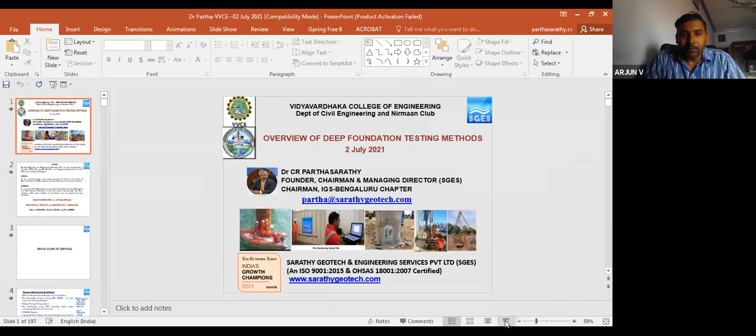Good morning, everyone. It's my privilege to introduce today's chief guest, Dr. Parthasarathy sir. Dr. C.R. Parthasarathy sir is a well-known person in the field of geotechnical engineering. He completed his BE and ME degrees in civil engineering and geotechnical engineering from Bangalore University. He completed his PhD from the Indian Institute of Science, Bangalore in the year 2002. He started his career as a geotechnical engineer in the year 1993. He has been involved in various investigation and engineering studies at various levels for multi-storied complexes, industrial buildings, embankments, bridges, water retaining structures, subways, pavement, offshore platforms, and pipelines.

Parthasarathy sir has worked in various countries like Australia, Malaysia, Indonesia, Vietnam, Thailand, Brunei, etc., and also in Singapore. Parthasarathy sir is the founder director of Sarathy Geotech and Engineering Services Private Limited. The company, with its registered office at Bangalore, was established in the year 2008, which provides both offshore and on-land integrated geotechnical engineering services in India and abroad.

Since 2008, he has been involved in various consultation assignments in the field of ground improvement, pile foundation, marine engineering, on-land geotechnical investigation, offshore foundation assessment including jack-up rigs and platforms. Apart from offshore pile monitoring, Parthasarathy sir is instrumental in promoting the quality testing of deep foundations in India. He is also a member of various professional bodies like the Deep Foundation Institute, Indian Geotechnical Society, Indian International Society for Rock Mechanics, and Indian Concrete Institute. He's a member of the Institute of Engineers, and also a member of the Society for Underwater Technology. It is our pleasure to have you with us, sir.

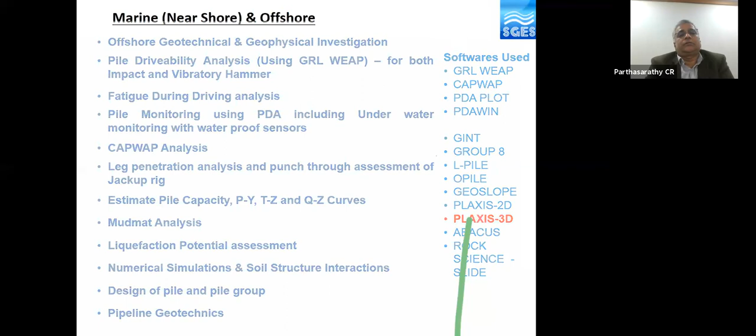Here is the set of softwares that we normally use. The recent one is Plaxis 3D for modeling complex three-dimensional soil structure interaction problems. In the onland space, we conduct geophysical investigation, geological investigation, geotechnical investigation with SPT energy measurement.

I won't spend much time on this, but I'll just give an introduction: design of shallow and deep foundation, dynamic pile load test, crosshole sonic logging, geotechnical laboratory. All the green ones are NABL accredited.

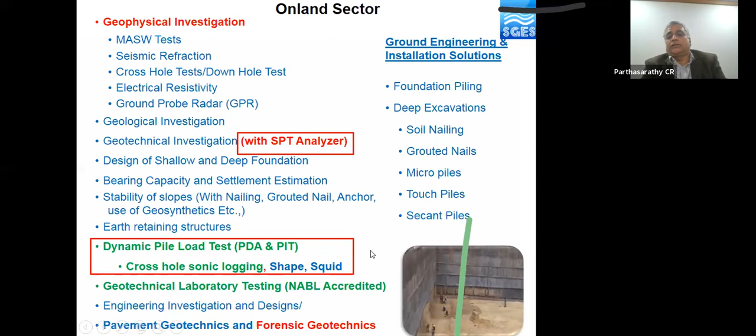I'll be discussing at length about these technologies. The ground engineering solutions, particularly for deep excavations, we have more than 15 projects of designing and building deep excavations with vertical cuts nearly up to about 18 meters. Currently, we are working on a vertical cut of about 22 meters.

So we have introduced these high-end multi-purpose drilling rigs, currently operational for the bullet train project in Surat. It conducts an SPT test with an automatic hammer, with energy calibration. We'll be talking about this using the strain gauge and accelerometers. It'll be similar to what we normally use for the high strain dynamic test as well.

Now coming to deep foundation testing, it's also one of our core competencies. We have complete solutions for deep foundation testing, starting from the conventional static load test: axial compression, pull out, and lateral, maybe with Kentledge or reaction methods. We have also recently introduced, partnering with a Malaysian company called YJACK, bidirectional load test. I don't think I'll be talking about this because of paucity of time. Low strain integrity test, crosshole sonic logging test, and thermal integrity profiler.

I'll just give an introduction to TIP. These two are the integrity methods to evaluate the integrity of the foundation. Shape and SQUID, I'll give an introduction, which is a quality control tool prior to pouring concrete. And we can discuss about this high strain dynamic test.

Okay, now there are many students here, so others kindly bear with me for a few minutes, maybe 2-3 minutes, before I give an introduction and set the context for today's presentation.

As we all know, when we have a weak ground, the loads from the superstructure have to be transferred to a competent ground, maybe available somewhere at a greater depth. That's where we use deep foundations, introduced into the ground, and the loads from the superstructure are transferred through this foundation, called pile foundation.

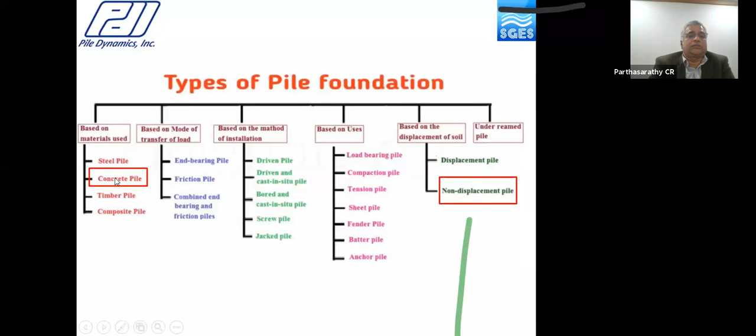So today's discussion will be mostly on the concrete pile, since this is non-displacement pile - driven piles essentially will be the displacement pile. So we will focus today's discussion on concrete and non-displacement piles. To evaluate capacity, as I said, the total capacity of the pile will be the summation of the skin friction component as well as the end bearing component.

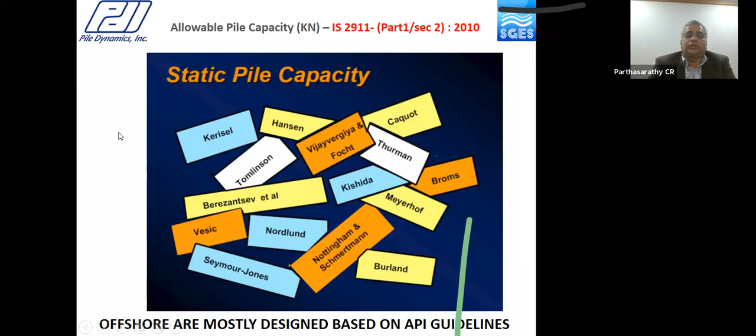There are many methods to evaluate the capacity of piles. I will not go into detail today. Usually for our marine or offshore piles, we follow the American Petroleum Institute guidelines, API guidelines. We also have the IS 2911 Part 1 Section 2 guidelines to evaluate the capacity of piles. So you can use any of these methods, whatever the owner specifications derive.

Now, this is how the static load tests are conducted. You put a kentledge on top of a loading platform, place your jack on the pile, and load it on the reaction methods, and all the loads get transferred. You measure the displacement using dial gauges. It has its own disadvantages - I think today's demand is to put a load cell to evaluate what loads are transferring, rather than using a calibrated jack.

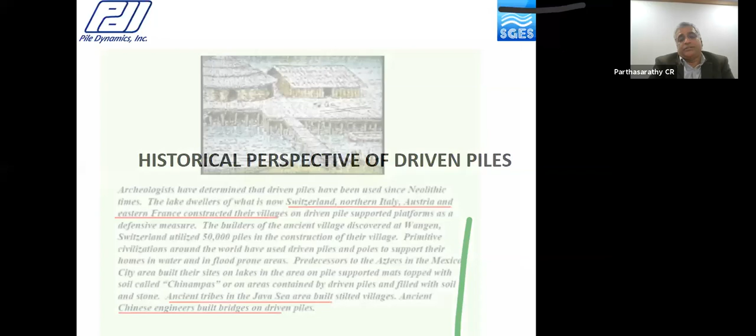So there was a project, an arbitration project. People said driven piles were used, and both sides - the client side, owner side - were all arguing that the pile foundation, particularly driven piles, were very new in technology. They did not know about this and were blaming each other. But when you look back at the literature, pile foundation is not new for civil engineers. Archaeologists have found that several structures were built on driven piles, even in Neolithic times. In those days they were all small diameter timber piles.

You know that the Romans built a bridge on the River Rhine within 10 days. In those days, similar kinds of pile installation methods were used - a primitive loading frame with dead weights - and even today we use the same thing to drive the pile. We just lift the dead weight and drop it on the piles to drive them.

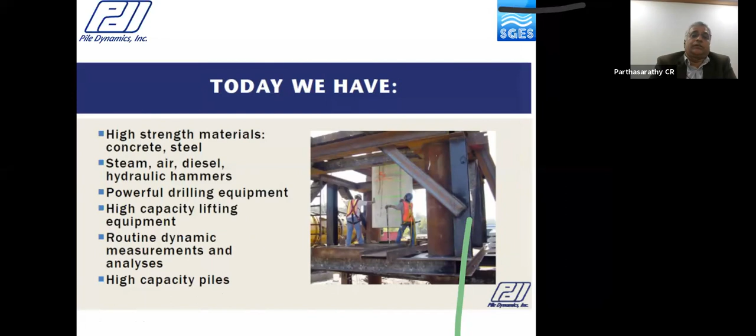So what has changed today from those olden days is the high strength materials, concrete and steel, and most importantly, the capacity of piles. In earlier days, timber piles had a small capacity of about 30 to 40 metric tons. Today, we are talking pile capacities in the order of about 7,000 to 10,000 metric tons. So that has changed today, and the technology has also developed to handle those kinds of high capacity piles.

From these early century skid rigs to drive the piles, today we have construction barges which can handle very high capacity piles. They can handle hammers weighing about 150 tons, which can impart energy in the order of about 2,000 to 3,000 kilojoules.

The pile size is also very small, from 3-4 inch micro piles to as big as around 3.5 meters. We have the experience of monitoring and measurements of those pile foundations.

If you go to the offshore wind sector, the monopiles are in the diameter of about 4 to 8 meters. The length of pile below the ground will be as shallow as around 2.5 meters, called stub piles, and as deep as around 150 to 160 meters is not uncommon. So we have seen all kinds of installations.

So this is a concrete pile, a precast pile. It will be cast in the yard. You can append sections, and then you can drive the pile.

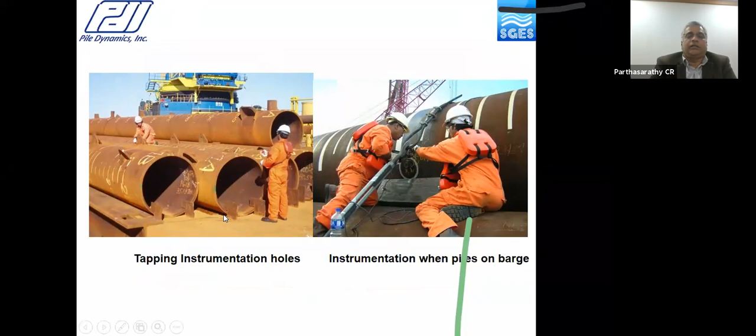So this is a steel pile which we normally use for oil and gas projects. These are open-ended pipe piles. Again, you append sections and then start driving into the ground.

So the piles are driven by hammers, either a gravity hammer or a vibratory hammer. Air or steam hammers and diesel hammers are very routinely used. But today we have hydraulic hammers which are very powerful, popular, and steel-to-steel, so they do not require any cushion. We can drive those piles with hydraulic hammers.

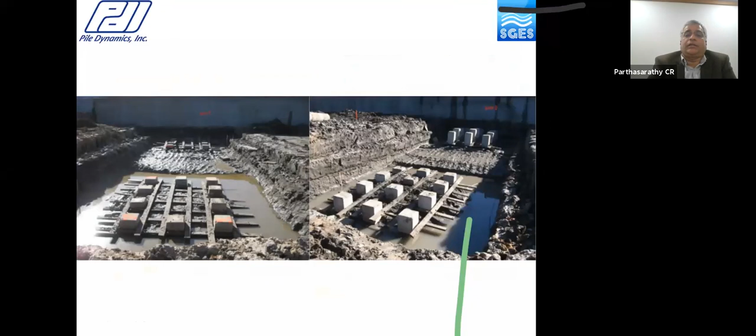So you use a template, particularly when you have soft clays. Even in marine conditions offshore, you use a jacket structure as a template, where the length of this jacket will be equal to your water depth. The piles are guided to this jacket and driven below the seabed.

Based on the set per blow, there are hundreds of empirical equations to evaluate or estimate the ultimate bearing capacity. You could see here the AIC, the Dutch formula, the Weisbach formula, the engineering news formula. There are hundreds of them.

So I draw your attention to this recommended factor of safety. All of these formulas recommend a factor of safety of 3 to 6 - even the Hiley's formula, Rankine's formula, and Janbu's formula.

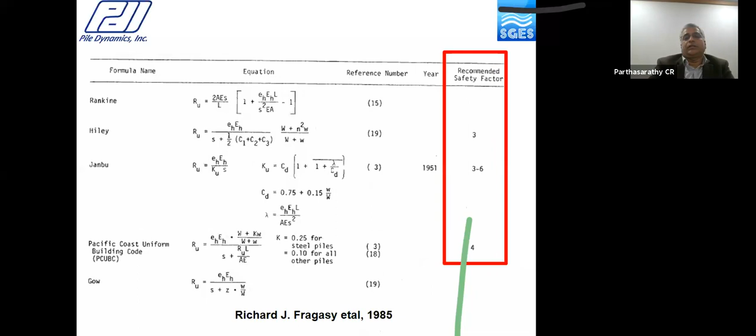We have seen that even today there are some projects which adopt the dynamic formula and use a factor of safety of 2, which is actually very, very unconservative. You cannot use that. The simplicity of most pile driving formulas leads to a major disadvantage: their inaccuracy. Use of these driving formulas exclusively can lead to dangerously low factors of safety and uneconomically high ones. The variety and number are matched only by their shortcomings.

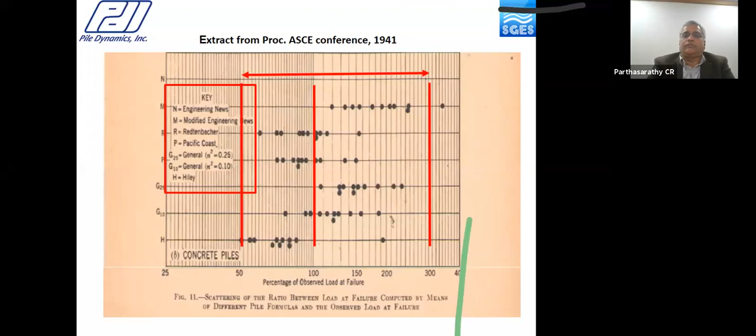And thus, the dynamic formula was disgraced in the early 1940s. Later on, Smith in the early 60s developed the one-dimensional wave propagation theory. The extension of Smith's work was the work of GRL and Pile Dynamics, who built the pile driving analyzer and so on.

So I'll give an introduction to that as well. In 2015, they released a newsletter, Pile Dynamics, stating that designs based on dynamic formula were already discouraged in the 40s. They were referring to that ASCE conference where Terzaghi had made that presentation.

During the installation of pile, the pile could be perfect. You can have an intact pile, or there could be an anomaly like necking, a reduction in cross section or impedance, cracking of the pile, or bulging of the pile. This anomaly can happen anywhere along the length of the pile - at the bottom, at mid level, or at the top.

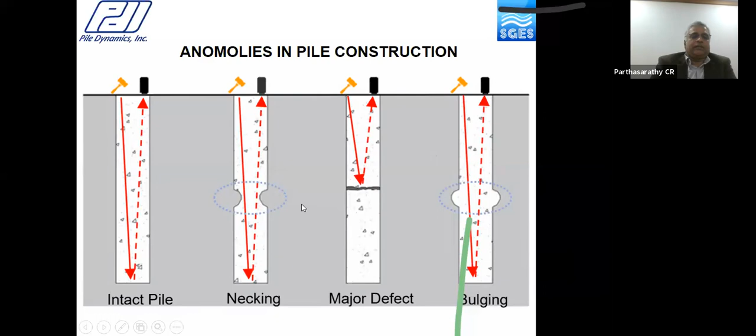Once the piles are introduced into the ground, there's no way you will be able to evaluate unless there are some measurements. This is a project where driven piles are already broken or bent. While excavating for constructing the pile cap, only 2 meters down, the piles are all broken. So there is no load yet, and these piles have to withstand the load from the superstructure of about 16-17 stories.

Now, during driving of those precast piles, the tensile stresses could be very high, even the compressive stresses could be very high. So the piles could be susceptible to damage.

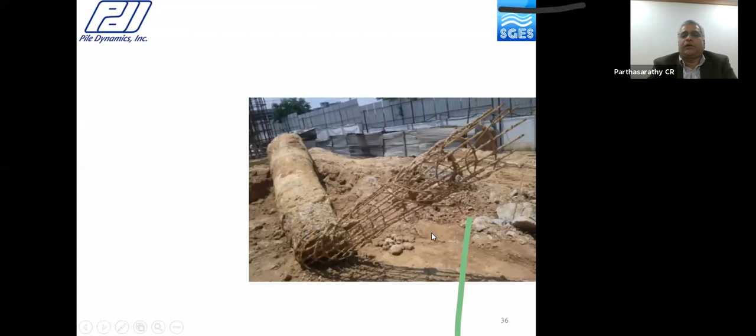This is another case where the pile was installed in a project which has to carry the load from a superstructure of about 22-story buildings. For the lift pits, they have to excavate a little deeper to cast the pile cap. So when they started excavating, they could see one stirrup. They excavated a little deeper, another stirrup, and finally when they exhumed the pile, the bottom 3 meters did not have concrete.

And this is not uncommon - we have seen this in many projects. It is a very short pile. The top of the pile is so good, but at the bottom there is no concrete at all. When you exhume it, you could see that these are all stub piles meant to be placed on the rock.

So you could see the anomalies in pile installation. The pile tops could be damaged, there could be necking, there could be bleeding of concrete, the pile toe could be damaged, there could be serious defects within the pile.

So how do we evaluate the defects in the pile once it is in the ground? Structural engineers and architects' work is already recognized because you see the superstructure, but the geotechnical engineers' efforts are already buried in the ground because these foundations are inside the ground. So you will not be able to evaluate unless there are some measurements made.

So friends, today we have a whole arsenal of modern technology and tools to assist in providing efficient and economical deep foundation solutions.

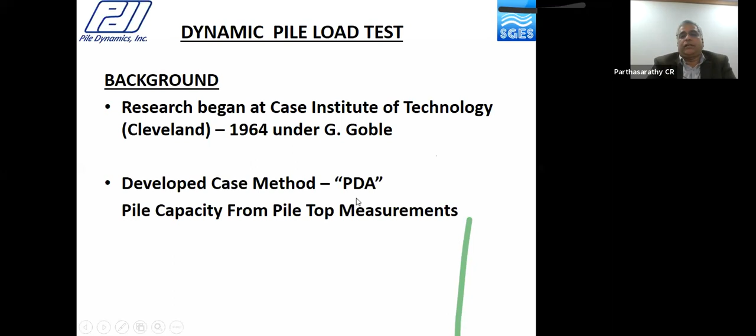Because of the limitations of pile driving measurements in earlier days, with only set per blow, research began at Case Institute of Technology and resulted in the development of the Pile Driving Analyzer, which gives pile capacity from pile top measurements. The Wave Equation Analysis Program - I will not be talking about this today - is essentially for pre-installation study for hammer selection. The Case Pile Wave Analysis Program is CAPWAP. This is a post-test analysis.

The data from the PDA is imported into the CAPWAP software and analysis is made to evaluate the capacity of the pile.

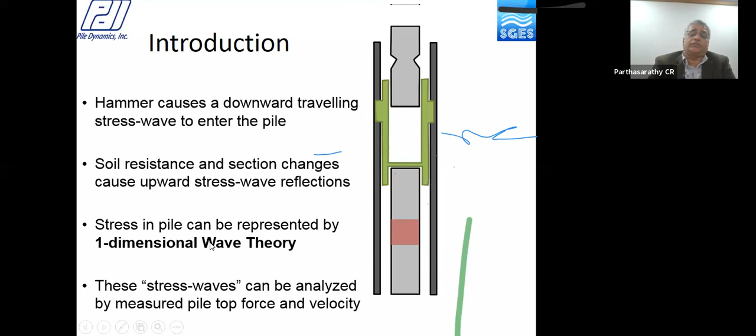And these stress waves can be analyzed by measured pile top force and velocity. So how do we make measurements of this force and velocity?

We can make measurements by embedding a strain gauge below the top of the pile. The strain gauge measures the strain in the member. We know the modulus, which is stress divided by strain, so if you have the strain measurements, you can get the stress. Knowing the cross-sectional area, you can get the force.

And mounting accelerometers measures the motion of the pile - integrating these accelerations will give the velocity. The force and velocity are proportional with a constant called impedance, which is defined as the modulus times cross-sectional area divided by the wave speed. I'm not going to derive this relationship today - this is part of the training program, so we can actually derive this relationship there.

So when there is an impact on the top of the pile, the stress wave actually enters - this is where you see the initial rise of the stress wave. As it passes through the gauge locations, the peak of those stress waves passes the sensor location.

That's where you see the initial peak. The stress wave propagates along the length of the pile. That is where you see the response from the toe.

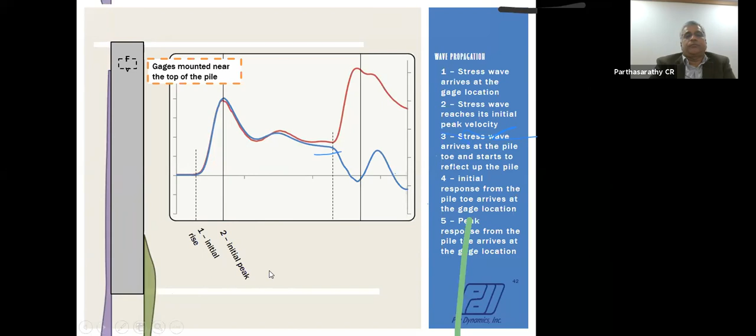The gauges don't see this unless the reflected waves come back to the gauge location. Now the reflected waves come back to the gauge location and pass through, that's where you see the initial toe response and the peak toe response.

So what you see on the graph is a force measured by the strain gauge. The other color is velocity multiplied by impedance, which is again a force unit. So it's force, velocity, time history.

Now this stress wave, when it enters the pile, has to travel a distance L, and then it has to travel another distance L when it reaches the gauge location to see the toe response. Therefore, from the initial peak, a time 2L divided by wave speed will be the time on the x-axis. That is where you see the toe response. This is the top of the pile, and 2L by C time thereafter you see the response from the pile toe.

Now the force and velocity are on top of each other. That means there is no resistance or impedance change, no cross-sectional change. If there is soil resistance, you will see a difference between the force and velocity. A separation of these waves we'll see in the next slide.

So when you give an impact in a low strain test, a small impact pulse goes down, travels down, and then there is a reflection, an upward traveling wave. So there's a downward traveling wave and an upward traveling wave.

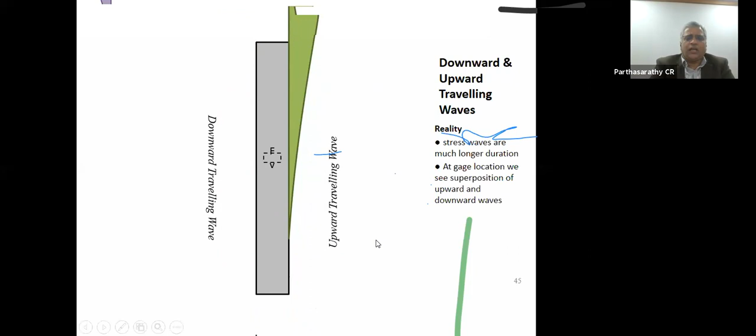So we need to separate what is coming down and what is going up. That's a part of the interpretation. I'm not talking about it in detail because of the paucity of time. I'm just giving you some introduction background so you all understand.

This is very important because when you undergo training, you will have this know-how, and you will be better able to put it into practice and collect good quality data, and analysis also becomes very easy.

So now getting back to the testing procedures, the quality control tools we have today: prior to pouring concrete, SQUID and SHAPE. Post-concreting, the integrity methods - low strain integrity, pile integrity test, cross-hole sonic logging, thermal integrity profiler, and the high strain dynamic test. We'll examine each one of them briefly.

So this is the SQUID, for Shaft Quantitative Inspection Device. This will evaluate the thickness of contamination at the bottom of the boreholes, because this is very important particularly for the end-bearing piles, which derive their capacity mostly from the base, say for example the rock-socketed pile.

We do not want to see any contamination at the base of the pile. If it does, the piles will experience large settlements during the load test, and you will not get the requisite factor of safety. So even prior to pouring the concrete, if we can monitor the quality aspects and ensure there's no contamination at the base of the boreholes, I think we are assured of the requisite factor of safety from that pile.

So the equipment looks like this. It has 3 penetrometers at the base. It could be like a conical penetrometer, similar to what we normally use in the CPT test in geotechnical investigation. It could also be a flat cone, a flat base. The area of this will be 10 centimeters square.

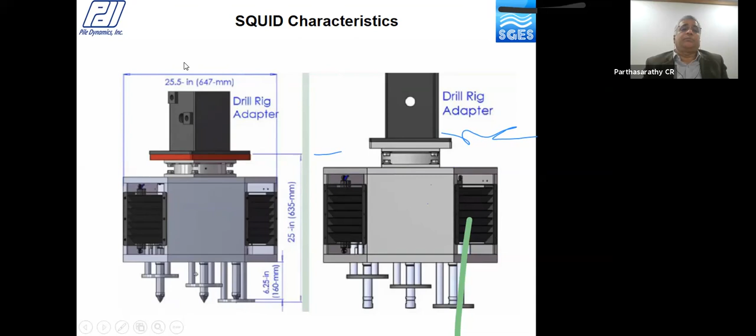This also has a retractable plate. As you push this tool into the borehole, there will be penetration of this cone, and these retractable plates move up. There's a force measured by the cone, and there's a displacement measured by this retractable plate. This can be connected to the Kelly bar of the piling rig directly.

So this is how it is attached. You could also have various sizes of these adapters, depending on the tool available on the site - 6 inches, 8 inches, 10 inches, or so on.

Now, as the tool is lowered into the bottom of the borehole, and the force is released by the Kelly bar, these cones start penetrating into the base of the borehole. The colored zone could be a contamination, and the retractable plates move up, so that's why you see the displacements. So what is the philosophy of this?

The philosophy goes back to Terzaghi's ultimate bearing capacity theory. We all know that for circular foundation, the ultimate bearing capacity is given by this formula. Now, when you have the contamination, which is assumed to be cohesive material with consistency of 12 to 100 kilopascal - if anything less than 12 kilopascal shear strength, it is expected that the contamination gets displaced when you pour the concrete. If it is more than 100 kilopascal, it is also treated as a natural material. So anything between 12 to 100 kilopascal consistency is treated as the contamination.

Why is this 12 to 100 kilopascal? Not necessarily 12 to 100 kilopascal - we have some guidelines from experience.

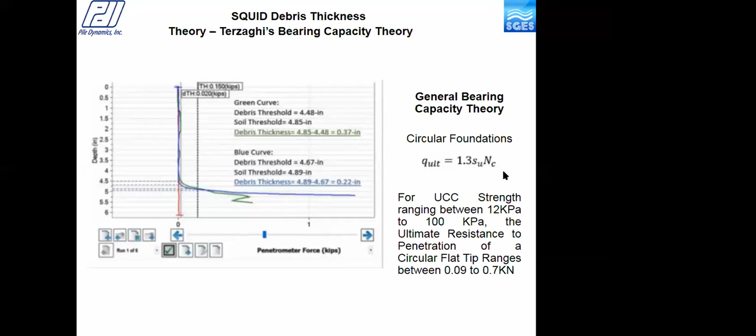So why is this 12 kilopascal, 100 kilopascal? This is some guidelines that Pile Dynamics have arrived at. If we have some local experience that, okay, up to 20 kilopascal, the consistency of the muck can displace, we are free to use that. If we want that, okay, up to 150 kilopascal, only then I consider this a natural material - we are free to use that. And this equipment has that option to actually input that value.

So we have the soil threshold and the debris threshold values. We can actually input that based on our local experience. But as a general guideline, 12 to 100 kilopascal is what is suggested by Pile Dynamics, which you compute for that 10 centimeter square area. You get a force of 0.09 kilonewton to 0.7 kilonewton, corresponding to 12 kilopascal and 100 kilopascal. So when you start lowering into the bottom of the boreholes, there will be a displacement of the retractable plates, and a force measured from the 3 probes.

When you reach between 1 to 2 kips, it is around 5 to 10 kilonewtons, you can actually stop the test because you are already reaching a natural material. You can unload, and then you can release the force and also release the displacement plates.

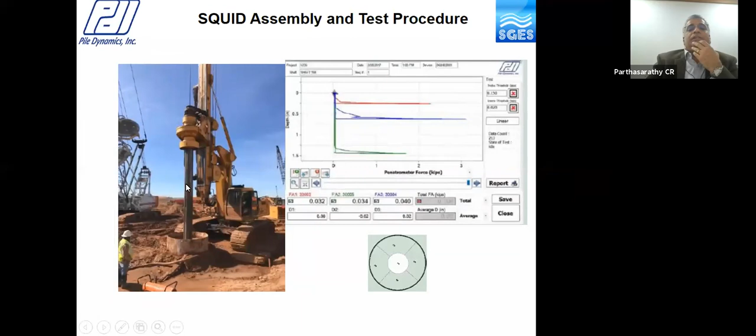So in the enlarged screenshot, this is the displacement corresponding to a force of 0.07 kilonewton, which corresponds to 12 kilopascal shear strength. This is 70.7 kilonewton corresponding to 100 kilopascal. The difference will be the thickness of the contamination at that probe location, and likewise for the other probe locations.

The philosophy now is the average of these 3 things should be less than some limit, some guidelines. So there are some guidelines that it should not be more than half an inch - there are some very strict guidelines in the US. So if it is more than half an inch, you have to clean the boreholes and redo the test.

So this is how you see the data on the tablet. Directly, it can give the thickness of those contamination for each of those probe location. If it is more than half an inch - here in this case the averages are nearly 4 inch - probably you have to do the cleaning of the boreholes and redo the test.

When you actually redo the test, you see there is no contamination at all at the base of the borehole. Therefore, you are very confident that the piles are going to take the load that you expect. Now, we introduced this in the Metro project. This is first of its kind in the country today.

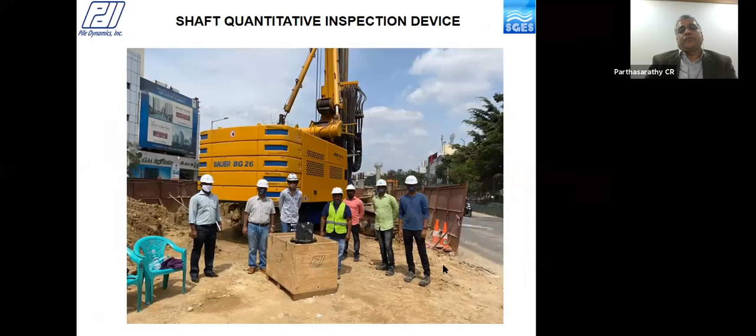The squid equipment was connected to the Kelly bar of the piling rig. We released it lower down into the bottom of the pile borehole. You see the contamination at one of the probes is 79.4 millimeter, 136 millimeter, 81 millimeter. The average is nearly more than 4 inches. So then the thickness is not acceptable, particularly for an end-bearing pile.

If this is a large diameter pile, you could do the test at different quadrants, 5 times 5 numbers, because all the 5 trials you can take the average. If it is a small diameter, say around 800, 900 millimeter, you could do 5 trials at one same place and take the average of all the 5 trials.

In this quadrant, you see the average is also still very high. And the next quadrant is very high as well. And the other quadrant also is very high. So it requires the pile has to be cleaned before they pour the concrete.

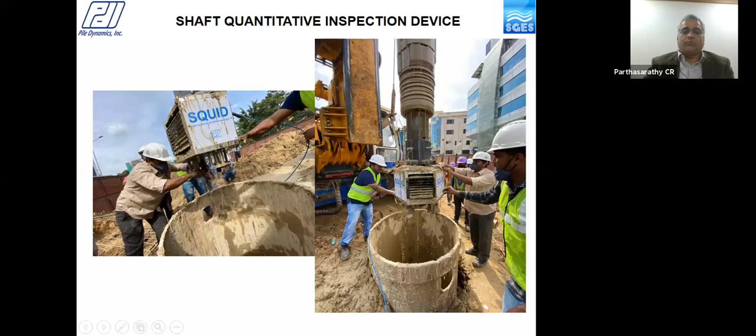When you remove the squid, you see the contamination sticking to the cones and the retractable plates. So this was a pilot project we commissioned, but apparently the contractor did tell us they cleaned the borehole before pouring the concrete. We did not do the test after this exercise. Probably in the next occasions when we have more database, I can share more information to you in the future.

So the next one is the shape. It's called Shaft Area Profile Evaluator. So this is also a quality control tool prior to pouring the concrete. This tool, like the squid, can be connected to the Kelly bar of the piling rig.

This has 8 ultrasonic sensors embedded radially. These ultrasonic sensors will release pressure waves when there is a change in the geometry of the piezoelectric element due to voltage. As you pass this equipment into the pile borehole, the pressure waves are released.

It hits the boundary wall, and there's a time recorded, and you know the velocity. There are 2 sensors at a known distance behind these radially embedded sensors, which will actually measure the wave speed for calibration purpose.

So what this shape will give you will be the profile of the pile bore excavation. What you could see here is the top of the pile, which has a liner. So there's no change. Below the liner, you see there's already an eccentricity, so the alignment has slightly changed. You see this is a diameter at the bottom, the red one, and diameter at the top. So the eccentricity is already there.

If there is an eccentricity, I think this will induce moments, and thus it will also reduce your load carrying capacity. Now, there is also a problem the contractors normally face when pouring the concrete. Suppose there is a weak material, a lot of concrete has gone in - the consumption of the concrete is more than the theoretical concrete. So you'll never be able to argue with the client because they will have a specific number put in the tender for theoretical consumption, but actual consumption could be much higher.

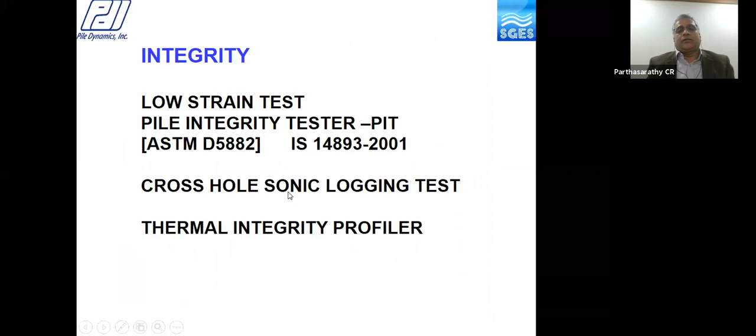Okay, now let us move on to the next topic, quality control after pouring the concrete. One is to evaluate the integrity. What are the methods we have? We have the low strain integrity test, cross-hole sonic logging, and thermal integrity profiler.

Let us examine briefly each one of them. The low strain method is quick and cost-effective to evaluate the shaft integrity of concrete, and this test is able to provide information on continuity, location of defect, and degree of defect. This will not give the bearing capacity of the pile, okay? And this is performed with a handheld hammer, a sensitive accelerometer, and a pile integrity tester.

So why do we do the test? In order to find defects, assure quality, and reduce the risk. We do not want deep foundations like this that don't carry the load that we wanted, and finally jeopardize the safety of the foundation and the risk also, right?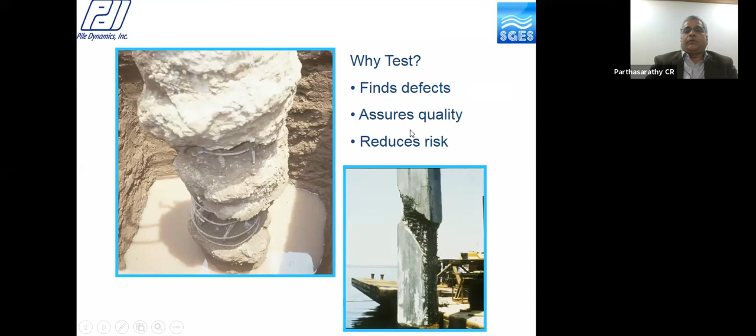The test is performed by actually preparing the pile top. All the loose contaminated concrete has to be removed, and then the locations where you mount the sensor has to be ground properly to get a flat surface. With a small handheld hammer, you give an impact, connect to the pile integrity tester, and you will see this velocity time history.

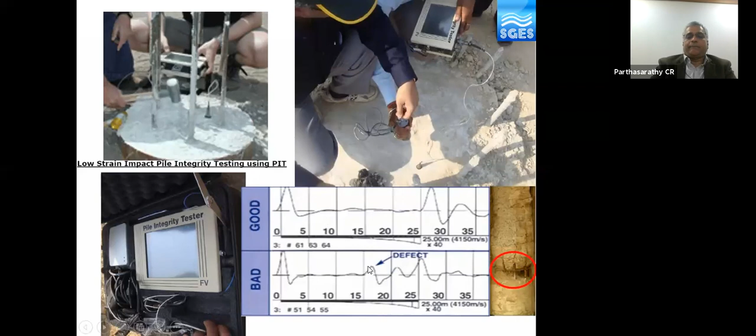This is the top of the pile, this is the bottom of the pile. If there is no resistance or impedance change, no cross-sectional change, this is how the data looks like. But if you see any necking, you will see a positive reflection. If there is any bulging, you will see a negative reflection here. This is very simple, but what you require is to get good quality data.

So in order to get good quality data, some amount of preparation is necessary at the site. You need to prepare the pile top by removing the contaminated concrete, cut the rebars to minimum length and bend them outside wherever possible, make a flat spot, and attach the sensors by grinding the surface to get a smooth surface.

Now, what do you think of this pile top preparation? If you think this is good, type good. If it is bad, type bad in the chat box, please.

The pile top is not ground in this case, so it is not acceptable. This pile top should be ground to get a nice flat spot to attach the accelerometers. Otherwise it becomes very bad. Yeah, many of you are giving feedback bad. Awesome, okay.

Now there are different types of equipment: a hammer, the accelerometer, and a tablet to get the data. There are wireless accelerometers that could be used, and this model is very small in size. It can be a palm top, you can see it on your hand. But the interpretations remain the same.

And more importantly, you have to decide on the size of the hammer. Why is this important? On the left side you see a 1 pound hammer, and the bottom is a 6 pound hammer, which has a very high width of pulse. This is a small width of pulse with a sharp impact.

Now why is this important? Because the width of the initial pulse affects the evaluation. For a very wide pulse, the reflection from the defect overlaps the initial pulse, making it even wider. So if there is any defect near the pile top, that gets masked.

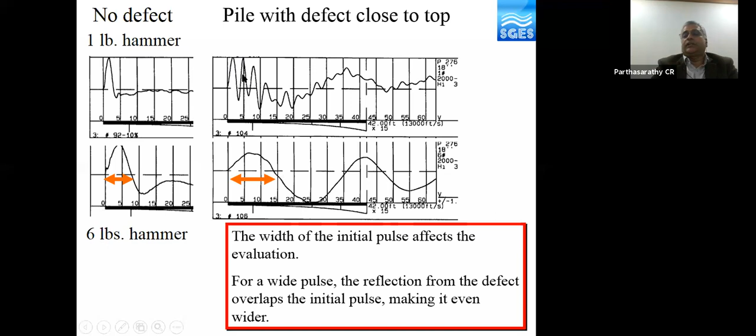You will not be able to detect this if you have a very big hammer. But if you have a small hammer, probably you can evaluate the defect near the pile top. That's why you have to calibrate these hammers for different types and sizes of piles.

As I said in the beginning, the piles can be very small in diameter to very large in diameter. It can be at a shallow depth of around 1.5 to 2 meters, and also the piles could go to around 70-80 meters, which is not uncommon particularly for bored piles.

So how is this data looking? Please type out in the chat box. How do you look at this data?

You see the top of the pile and the response on the pile toe, right? Do you see any anomalies here? There's no anomalies here, because there are no positive reflections. So this data should be very ideal, very good data.

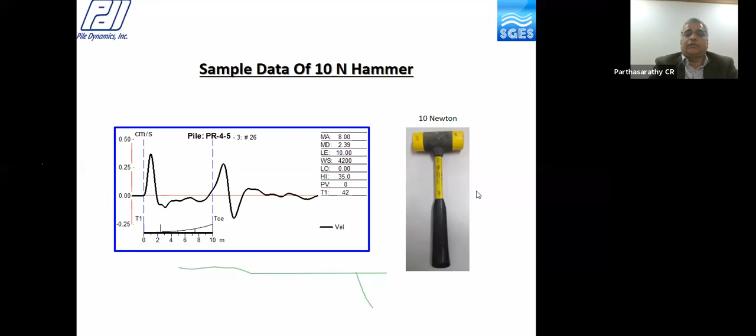Now you have to tell me. Please tell me what do you think of this pile on the top, the first one. Is it a good pile? Is it a bad pile? Please type out on the chat box. The top one, is it a good pile or a bad pile? If it is good, type out good. If it's bad, type out bad.

Very good, good, thank you. Awesome, very nice response. So this is a good pile.

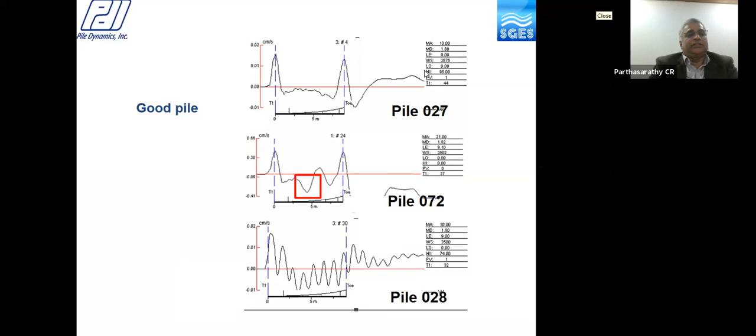So this pile has a bulge, because there is a negative reflection. It is a pile with a bulge. And what's the last one?

Can anybody type out what is the last one? What do you think about the last one, the third one? Someone says anomalies, crack, the top one, defect. Yes, so there is a serious defect near the top of the pile, and you see a positive reflection close to the pile top, indicating a serious defect near the top.

So this is how the interpretation works. To get this kind of good interpretation, you need to get good data. If you do not get good data, it becomes extremely difficult to analyze.

There are many other interpretation methods. Even before interpretation, you have to do the conditioning of the data. I'm not talking about this because there's no time - it's a fun, full-day course actually learning about the pile integrity test itself.

Now I'll just share with all of you one case study. You see the top of the pile, there is a bulge, and then there's a neck. We understand that a positive reflection is a neck and a negative reflection is a bulge. And for the given pile length, you see the toe response here.

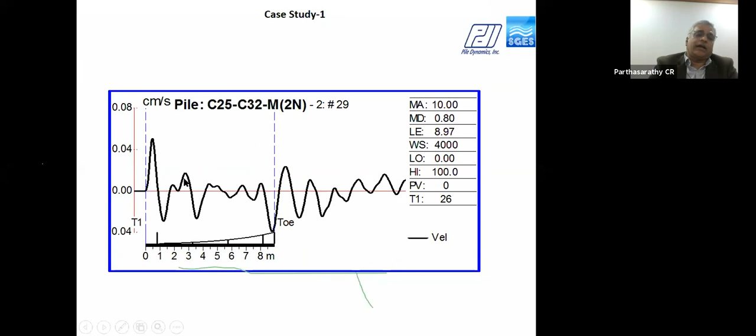So is this bad or good? Well, let us examine that.

Actually, this is a positive reflection because the bulge is returning to its nominal diameter. Let us see this bulge returning to nominal diameter. Okay, so this is how the bulge is there, very close to the pile top, and then it is returning to your nominal diameter.

For that kind of data, our boys have gone and physically measured the diameter at various pile penetrations, which is what you see here. The average of this is between 1.4 to 1.6 meters. If you run a profile analysis, the bulge is evident here and it is returning to a nominal diameter. This per se is not a bad pile. This is a bulge returning to nominal diameter.

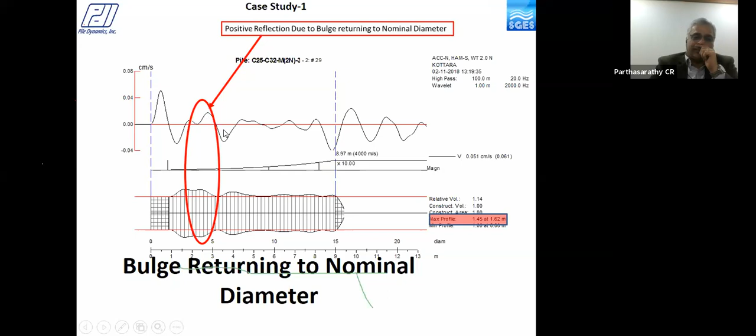So when you have a negative followed by a positive, you have to be very careful in the interpretation. But if there is a positive first and a negative, it is for 100% sure there's going to be a defect in the pile. Slow with the other direction, the photographs clearly indicate there is a bulge returning to nominal pile diameter.

Now, what do you think of this? Pile length is 5 meters. So what do you think of this pile? Can you type out in the chat box? Is it a good pile, bad pile, or a short pile? Please type out in the chat box.

Short pile. Yes. Awesome. See now, short pile. Very nice. Now, why is it a short pile? Let us examine this.

This pile length of 5 meters is given by the client. When you actually look at the data, there's a positive reflection happening prior to the toe, right? That means for this length of the pile, up to 3 meters, the integrity is fine, but below that is a question mark.

Now, when you actually exhume the bottom of the pile, up to 3 meters from the top it is excellent, and below 3 meters, I think there's no concrete here. That's where you see a positive reflection indicating a serious defect in the pile.

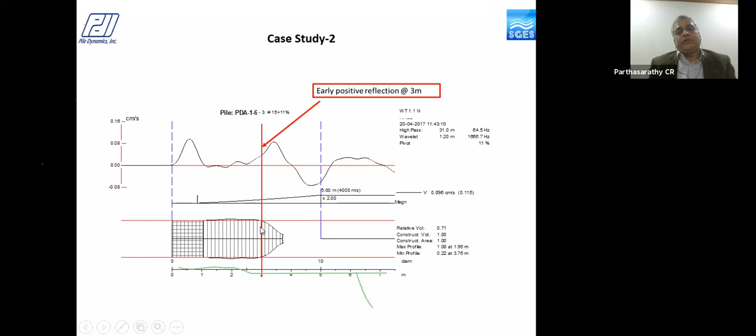So this is how these tests are powerful in evaluating the major defect of the pile, and this pile can be considered a short pile because the length is only 3 meters. Beyond that, it is not going to carry any load. Even if you run a profile analysis, you see the volume of concrete consumed is only 70%. For that 70%, the shape of the pile is very good only in the top 3 meters, and beyond that there's no concrete.

Okay, I can skip this; a similar case I already explained. We have seen so many cases, but just as illustrations I picked up two cases. Now we saw the force-velocity time history, positive peak first, and then the response from the toe. There are some equipment that give you a mirror image of the data we've seen earlier. This is a European-made equipment; the earlier one is the US-made equipment. So don't get confused, this equipment is also in the market today - only the interpretation is a mirror image.

Now, the advantage of PIT is it's fast, inexpensive, mobile equipment. It requires minimum support, and you can test as many piles as possible. The guideline is to test 100% of the piles. No advanced planning is required, unlike the next method I'm going to discuss. Only the pile top preparation is necessary, and it will find the major defects - we have already seen some illustrations.

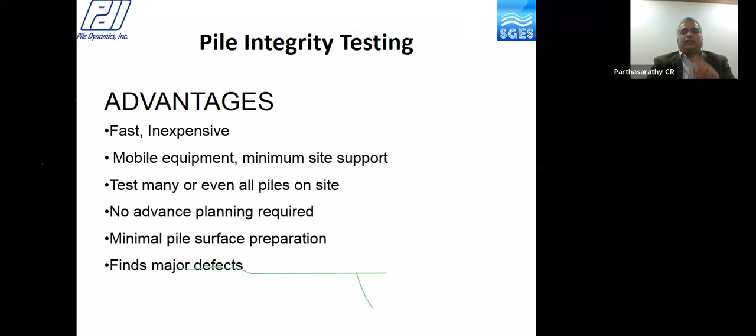Now moving on, the next integrity method is the cross-hole sonic logging test. This is frequently specified to detect defects in drill shafts. Since drill shafts are very few in number - for a pier you may have some 3, 4, 5 drill shafts - each of those drill shafts is expected to perform very well, and we have to assure the integrity of those foundations. So how is the test performed?

The test is performed by embedding access tubes - PVC or steel tubes tied to the reinforcement - prior to pouring the concrete. Then you pour the concrete with the bottom closed and fill these tubes with water. This is how the access tubes are embedded. How many access tubes to be installed? That depends on the diameter. As a thumb rule, for every 300 millimeter diameter, one access tube is required. Then you insert the probes - one is the transmitter, the other one is the receiver.

So once you insert these probes to the bottom and you pull the probes bottom up, for every 50 millimeter, there is a sonic wave that is emitted from the transmitters, which is received by the receiver. The time is recorded, and you know the velocity. So it's like the ultrasonic pulse method for concrete. As you do a bottom pull up, every 50 millimeter, you will be able to record the data.

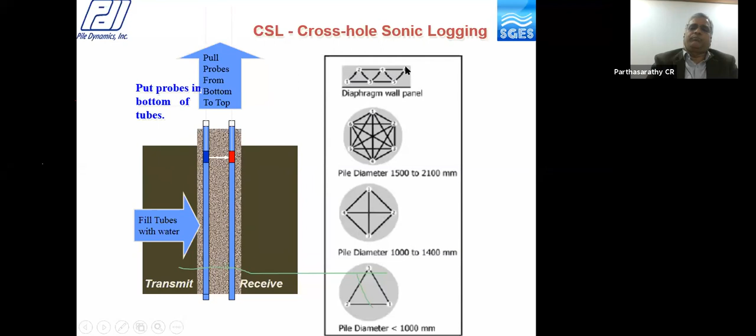So this is how the configuration of the access tubes depends on the size of the pile. If it's a larger diameter, you can have up to 6 in numbers or even more. For a barrette or a diaphragm wall, you can embed this every 1 meter distance. Now, it's very important to measure the distance between the access tubes.

Because this measures the time, and you know the distance to get your speed and velocity. This is a CHAMP cross-hole analyzer, the latest model called CHAMP Q. This can be calibrated as per ASTM standards once every 2 years. And recently, those probes are called transceivers.

It can transmit as well as receive from the other transceiver. So this is also the certificate of those transceivers. These transceivers need not be calibrated. Only the equipment has to be calibrated as per the ASTM standards.

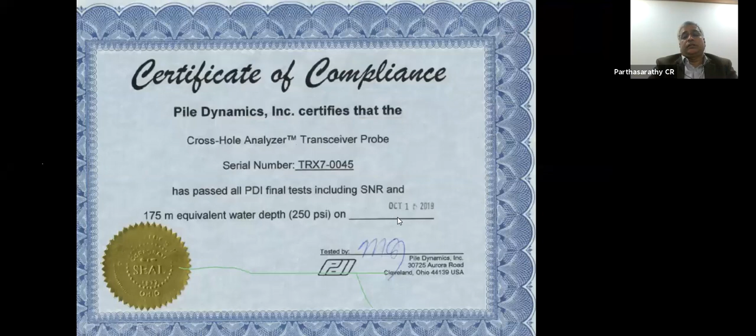And you see the different color-coded wires that go into these probes. So you can use 4 probes at a time. So the efficiency has now improved by 6 times. That means you can introduce these transceivers in 4 access tubes and pull simultaneously. So all possible combinations of these 4 probes introduced can be recorded with the data. So this has actually increased the efficiency by 6 times.

This is one of the accreditation sites where we tried to introduce this cross-hole sonic logging test, with only 3 access tubes. You see the 3 wires going round and pulling simultaneously. If you have 4, you can put 4. If you have more piles, you have to do a second trial.

Now these sonic pulses are emitted, and then it is received by the receiver. There is a transit time between the emitted signal and the received signal. This is how, and this cross-hole sonic logging test will give you a waterfall diagram.

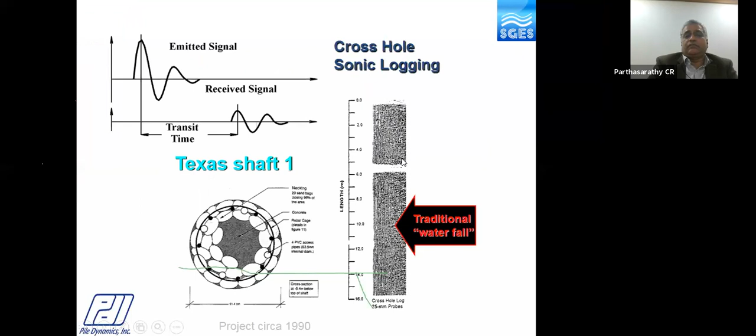First arrival time is very essential here. This is how the waterfall diagram looks. If there is any defect, then the first arrival time is delayed, which will tell us there is a defect. Very simple to interpret. The waterfall diagram is here, and you see the first arrival time is delayed.

And so wherever there is a delayed first arrival time, the energy is going to be very low here. So this is low, and this is high energy, and this is the first arrival time. So the first arrival time is delayed here, in this case, which indicates a defect in the pile. So this is a good pile where you have the signatures with high energy; reduced signal strength, lower energy, or a delayed arrival time indicates defect in the pile.

So interpreting flaws and defects is very simple. On the screen you could see the waterfall diagram, and you could actually find out where the defect is. So I'll give some exercise now.

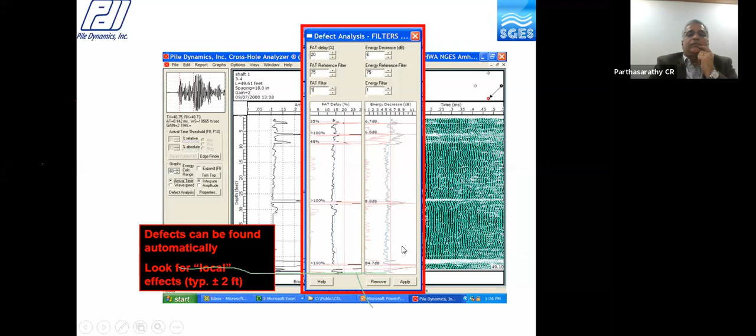After day 1 concrete, day 2, day 3 concrete - so when do you do that test? Generally some guidelines say up to 7 days. So it's good that between 3 to 7 days, anytime you can do the test. And you should start doing the test repeatedly, maybe 3 days, 4 days, 5 days, 6 days, because if you use a PVC tube, there could be some debonding issues. So up to what time the debonding will happen, you have to evaluate that. And within that time period, it is good to start doing the test. So, in order to avoid any wrong interpretation, generally between 3 to 7 days, you could do the test.

So you see the waterfall diagram, the first arrival time is delayed, and there is a serious defect in the pile. Now where do you think the defect is in this pile? Can you put it on the chat box, please? Where do you think the defect is on this pile?

Awesome. It is at the bottom, the toe, near the toe. Very good, it's the bottom. Good, bottom, okay. You see the bottom of the pile is defective. When they actually exhumed it, you could see the defect in the pile.

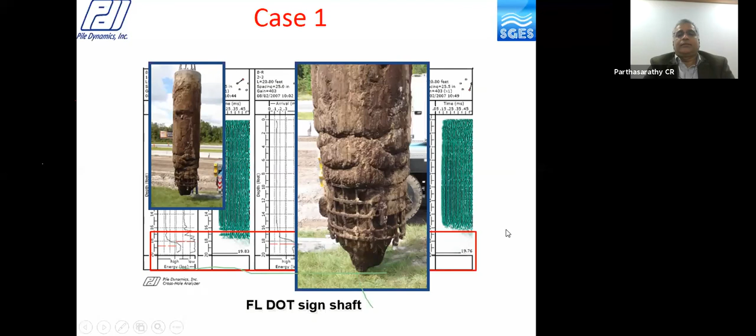On this one, where do you think the defect is on the pile?

Near the top, very good. While pouring concrete below water, there was some tremie issues, and there was some bleeding in the concrete. When they actually recovered the cores, you see the contamination, and thus the shaft was rejected.

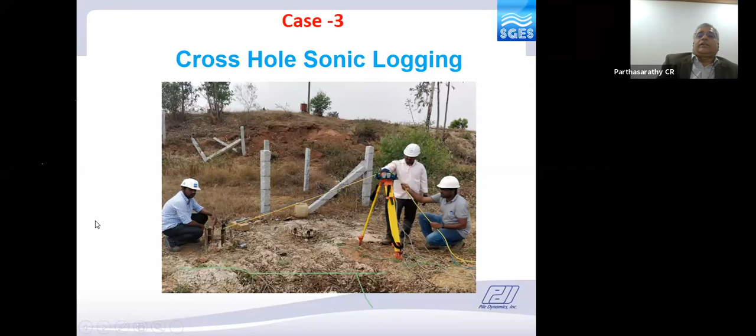So as I said, for accreditation purposes, we actually tested one good pile and one bad pile. There was a forced defect put into one of the piles. Now you tell me, what is the quality of this pile?

Please type it out in the chat box. What is the quality of this pile? Awesome, good pile. So this is actually a good pile, right?

Now how about this one? Where do you think the defect is? This is 2.5 meters, 3.5 meters, 4.5 meters. Halfway, midway, bad in the middle. So this is exactly where you see the defect. The first arrival time is delayed, and the energy is low. You should have a constant energy here, but it's low here. It clearly indicates that a defect exists.

So that's where you need to check all possible combinations of the access tubes. This is one combination, and the same thing appears in the other combination. If it's visible in all combinations, that means the defect extends throughout the cross-sectional area of the pile.

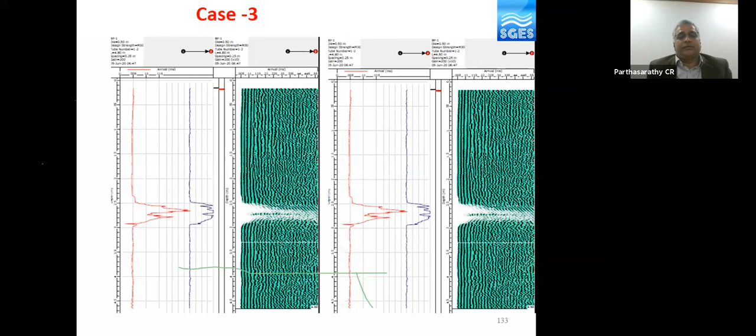You can also run a tomography analysis, which gives you a three-dimensional picture using tomography software. So to quantify the defects and determine whether it's localized in one quadrant or extending throughout the cross section, you could run a three-dimensional tomography analysis using the software to get a picture of the defect.

So in summary, the automated defect analysis can assess concrete quality and provide numerical and graphical presentation. A shaft with no defects need not be done anything because it's really good. And if the defect is present in all possible combinations and extends throughout the cross section, then you don't need to do any extra analysis.

If you think there's a defect in some combinations of the test and absent in others, you could visualize that these defects are localized to some quadrant. So you may need to run some kind of tomography software to quantify it, and then consider some remedial measures. Maybe you can grout those areas, and a shaft with local defects can be analyzed with tomography.

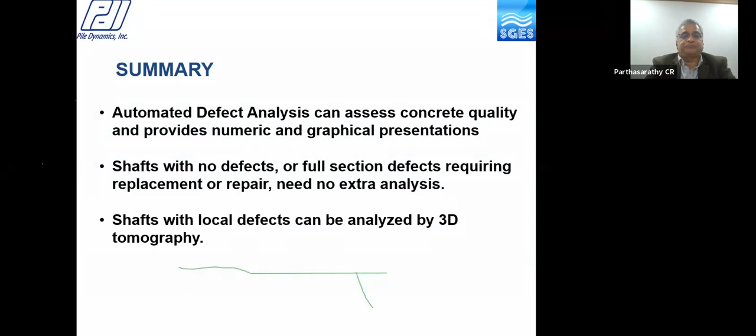Maybe I'll play this video first. This is about thermal integrity profiling. I'll just play this, it's only a 2-minute video to give you some insight on how this thermal integrity test is performed.

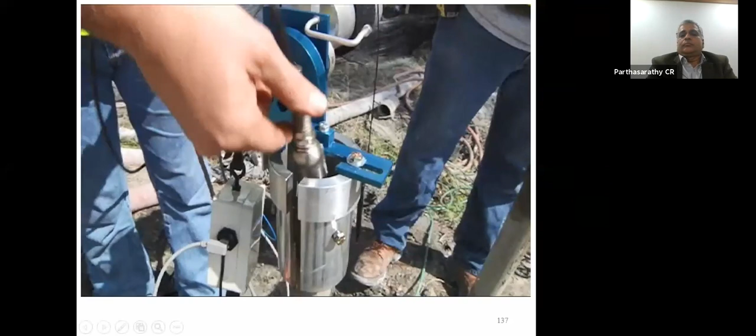Thermal integrity profiling. A concrete shaft is drilled on a bridge construction project. Access tubes are tied to the reinforcement cage and concrete is poured. About a day after, the integrity of the shaft is tested by thermal integrity profiling, or TIP. TIP is performed while the concrete is curing, since the heat it generates is a function of concrete volume and quality. An engineer inserts a thermal probe in one of the access tubes and lowers it down the tube. The probe measures the temperature of the curing concrete and an instrument records it. Cooler temperatures indicate reductions in concrete volume or poor concrete quality. Warmer temperatures indicate increases. The engineer repeats the test for each of the tubes.

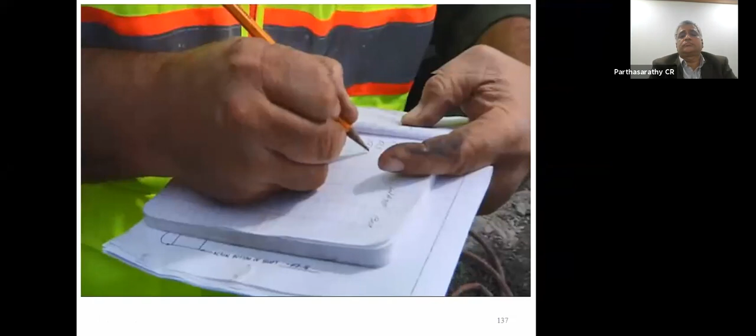In another test setup, the reinforcement cage is fitted with thermal wires instead of access tubes. The wires contain sensors that constantly measure the concrete temperature. The engineer analyzes data on a computer displaying the measured temperatures along the length of the shaft for various measurement points. The total volume of concrete installed in the shaft is shown on construction records. An engineer runs software which uses that information and the measured temperatures to estimate the shape of the shaft. The engineer also evaluates the thickness of the concrete cover and the cage alignment. TIP evaluates concrete quality and shaft integrity not only inside, but also outside the reinforcement cage.

The cross-hole sonic logging test will evaluate the integrity within the reinforcement because that is where you are making the measurements. But the thermal integrity profiler not only covers inside, but also covers the cover portion up to the diameter of the pile. We do not have this technology yet in the country today, but we will introduce it this year, probably to the market, because it's one of the very powerful integrity methods.

So the last part is the high strain dynamic test. We discussed the quality controls before pouring concrete, the squid and the shape, and after pouring the concrete, the low strain integrity test or PIT, the cross-hole sonic logging test, and I just made an introduction video on the thermal integrity profiler.

So now we'll talk about the load carrying capacity methods called high strain dynamic test using the pile driving analyzer. Here is a strain gauge accelerometer which will be mounted near the pile top, somewhere around 1.5 to 2 times the diameter below the pile top. A pair of strain gauges and accelerometers on either side, diametrically opposite. For bored piles, we'll have to use additional strain gauges. I'll describe that in a minute. It could be on a steel pile or a concrete pile, and these are connected to the pile driving analyzer.

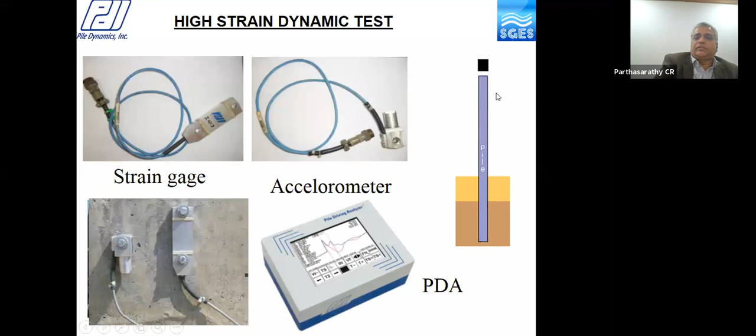When there is an impact, the stress waves propagate along the length of the pile, and there is a reflection from the bottom. So what you see is the force-velocity time history. You're already familiar with that. You see the force and velocity are on top of each other, which indicates there is no resistance, right? When there is a separation of waves, as you could see here, it means there is significant resistance being activated along the shaft, that is your skin friction.

Now, there could be two extreme conditions in interpreting the data: one is your free end, the other is a fixed end, and this is very important. When you get a free end, when you're driving a pile into soft clays, the pile is moving. Why is it moving? Because there is a free end. The reflected wave is in tension, it pulls the particle down. That is where you see the velocity at the toe response is positive. Velocity is positive at the toe, and that is treated as free end.

The other extreme is when you socket the pile into the rock. The reflected wave will not be in tension, it will be in compression. So if it is in compression, then it will be a rebound, and the velocity will be negative. That's how you see a negative velocity at the toe indicates very large resistance, while positive velocity at the toe indicates very poor resistance, or maybe no resistance.

In between the top of the pile and the bottom of the pile where you see this toe response, if there is a separation of the wave, force and velocity, it indicates your skin friction. The area under the curve will be the magnitude of the skin friction. This is very simple, but you have to learn deeper into it. You need to attend the training programs, where we can also discuss the derivation and so on.

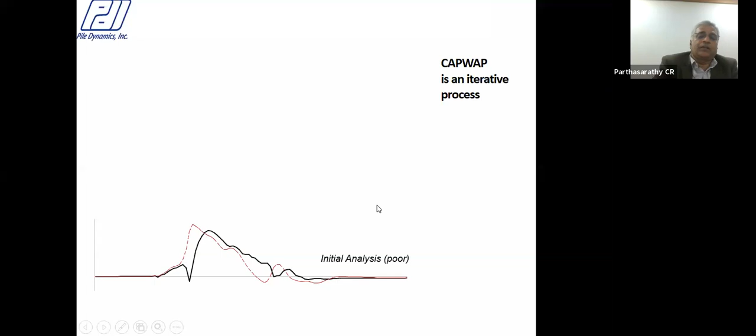So what you see here is one of the measured signatures, the black one, and the red one, once you import it into the software, is not on top of each other. That's why your analysis is not complete, you don't have a solution yet. So the initial analysis is very poor. Then you redistribute resistance along the length of the pile and at the base. Probably the analysis now is slightly improved, but not good or satisfactory. You adjust your damping factors.

The dotted line is your computed curve from the software, and the thick line is your measured curve from the pile driving analyzer. With this adjustment of damping, it's coming pretty close.

You adjust the soil quakes, some total capacity, and some unloading parameters. Now you see the measured and computed signatures are on top of each other. This completes your analysis.

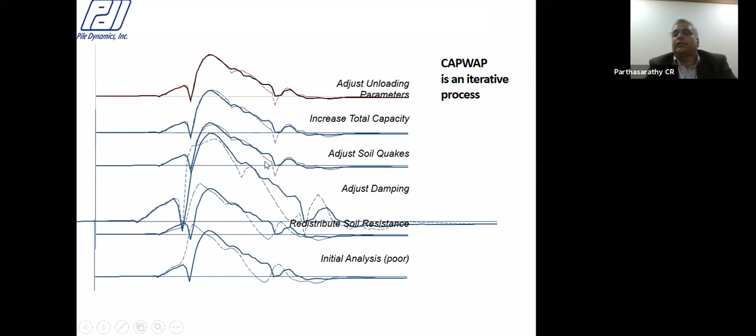Is it going to be a high end bearing or a high friction with a negative velocity at the toe? Awesome, awesome, it's a high end bearing.

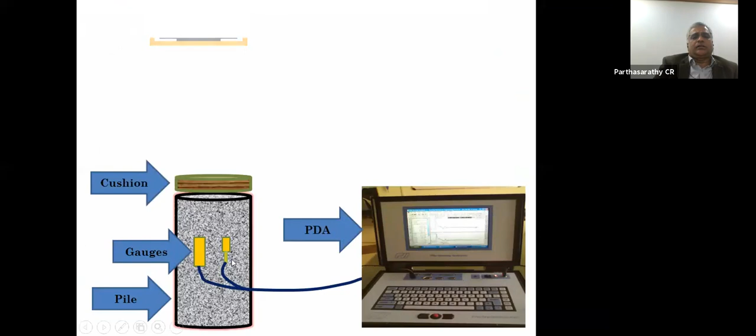It's very important to prepare the pile top, mount your sensors on top of the pile, place a cushion, and then give an impact to test the bored piles using a dead weight. The dead weight can be somewhere between 1 to 2% of the ultimate capacity to be proved. Once you give an impact, the force-velocity time history is captured from the pile driving analyzer.

We are already very familiar with this curve. So what you require is the pile geometry, grade of concrete, volume of concrete, and reinforcement details, because these will dictate when to stop the test.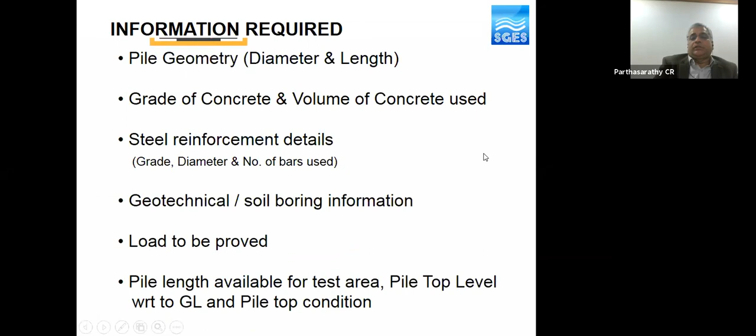You don't want to overstress the pile material. You need geotechnical data and the load to be proved, so accordingly you can choose the dead weight to be dropped on the pile, and what pile length is available for the test area, because you need to prepare the pile top.

Either you can grow the pile above the ground or excavate around the pile and prepare the test section, which will be around 2.5 times the diameter. You can mount your sensors 1.5 to 2 times the diameter below the pile top.

Very important, again, like PIT, you need to give utmost importance to pile top preparation by reinforcing the test section, removing all the contaminated concrete, and then pouring the concrete, vibrating it, and making it level. If you do not follow these procedures, you will not get a good pile top. These steps will give you a very good pile top and very good data.

Your analysis becomes very simple. So what do you think of this pile top? Can you put it on the chat box? Is it good or bad? Please put it on the chat box. Nice, very good, very nice.

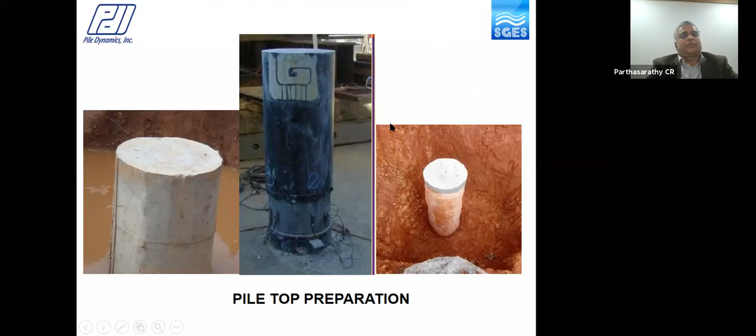Very nice, very nice. Okay, you need to have a good pile top.

Then at the location where you want to mount your sensors, you mark it, and these sensors have to be along the pile axis, particularly the accelerometer. Otherwise, your data will actually give you a wrong measurement on the cosine of that inclination. So it has to be along the pile length.

Diametrically opposite, you mount one strain gauge here, one accelerometer, 180 degrees apart, because there's going to be severe bending. So we need to take the average of the opposite sensors, particularly strain gauges. Particularly for bored piles, it is preferred to have the sensors mounted every 90 degrees, so that if one of them is not working, you clip off the opposite one.

So you do not lose all the data to analyze. If you have 4 strain gauges and one malfunctions, you can clip off the opposite one, but still have another pair to run the analysis. We'll see this in one of the data sets.

The good practice is to mount 4 strain sensors, particularly when testing large diameter drilled shafts. So these are 4 strain sensors. Always make it a practice to have 4 strain sensors, that will make your life very easy. Otherwise it will be miserable. If you don't get data, then you have problems.

So what do you think of this pile top? Put it on the chat box, please. Type it out.

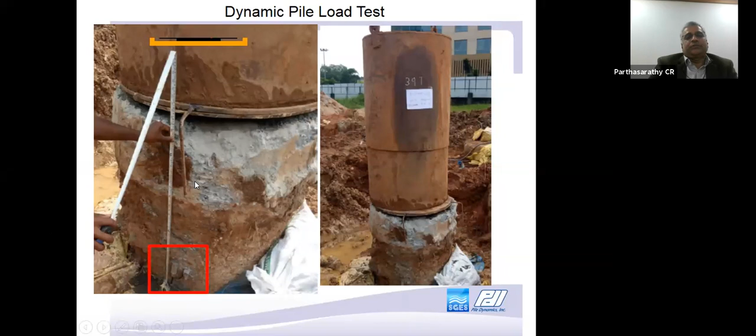Very good. So when you are mounting these sensors on this bad pile top, can you get good data? Definitely you can't get good data, right? And if the pile tops are not strengthened and prepared properly, during an impact it breaks. Once it breaks, you lose all the time and opportunity to do the test.

So you have to redo it and come back again after curing 14 days, 28 days. Time and money are lost. So at the first place itself, we should do things right.

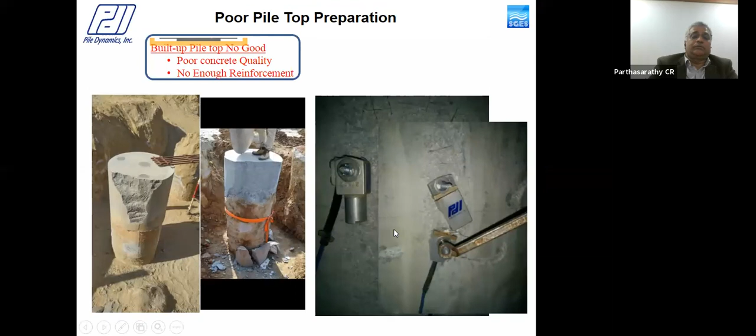It will also damage your sensors, which are very expensive, $1,200. The cost of bringing them to India, you'll have to pay 35% customs. So never do shortcuts that damage the sensors.

These dead weights have to be dropped on top of the pile. Safety is a concern, so you have to be very careful about how to drop with the safest methods. One improvisation is the donut system. This is a small 3-ton dead weight being dropped on a 600 diameter pile. You could cut the wire rope at the top, but with this donut system it's getting dropped on top of the pile.

Yes, you have an impact. Once you have an impact, you could collect the data: force, velocity, time history. So there are various dead weights that can be adopted.

I'll just illustrate a few case studies, maybe another 2-3 minutes, and I can conclude this session.

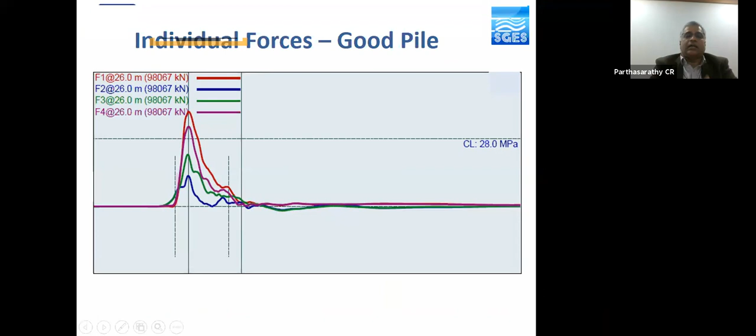Now, there are 4 strain gauges. I always said that for large diameter piles, you mount 4 strain gauges 90 degrees apart, and 2 accelerometers is good enough. Actually, accelerometers should be opposite each other. So since you have 4 strain gauges and 2 accelerometers, you could choose or pick up the good data.

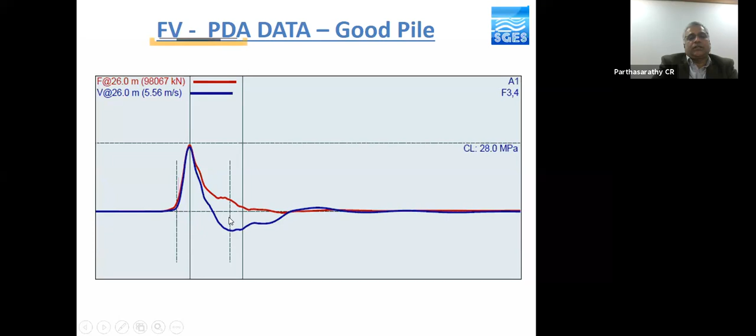Very nice data. There's good proportionality here, and you see the separation of the waves. This is skin friction, and you have significant end bearing also towards the toe of the pile.

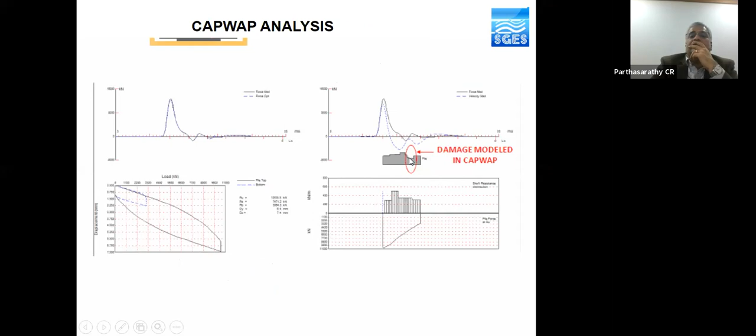Now, what do you think of this data? This is your toe of the pile. Earlier to the toe, the velocity is positive here. Positive velocity indicates your free end. Free end is a defect or a good pile? So can you put it in the chat box, please?

Good. Thank you. Defect. Awesome. Defect. Okay, so this is a defect, right?

So when you run the CAPWAP analysis, this is an upward traveling wave. This is a tension here. This should actually happen at the toe, but if the tension is happening ahead of the toe, it indicates a defect. So the same thing is also visible here - the positive velocity is happening before the toe, it indicates defect.

If you actually model this in the CAPWAP, you see the reduction in the impedance is almost a free end. And the pile integrity is only okay up to this depth, and beyond that, there's a serious defect. If you do not model this impedance, again, I repeat, you have difficulty getting this match between the computed and the measured signature.

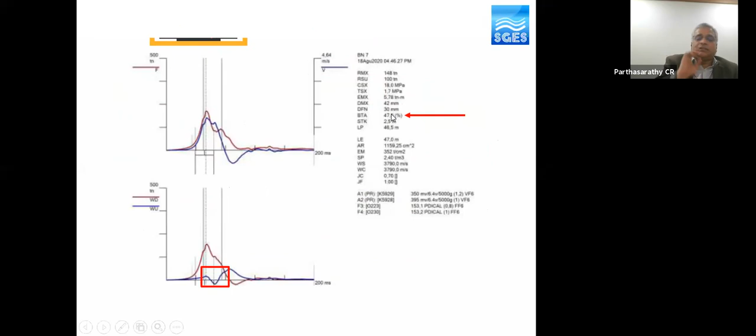The last one is again a defect tension. This is a spun pile. The integrity factor is 47%. So anything less than 60% is a broken pile as per the guidelines of the manual.

Now the other one, I want you to look at this. There's no separation of waves. What do you think on the capacity? Do you have capacity or no capacity? Please put it on the chat box, please.

I'm concluding, finish another one or two minutes, I'll close. There's no separation of waves between force and velocity - do you think that you have capacity? You have no capacity or you have high capacity?

Very less capacity, maybe no capacity. Very good, very good, awesome. Low capacity, no skin friction, fantastic.

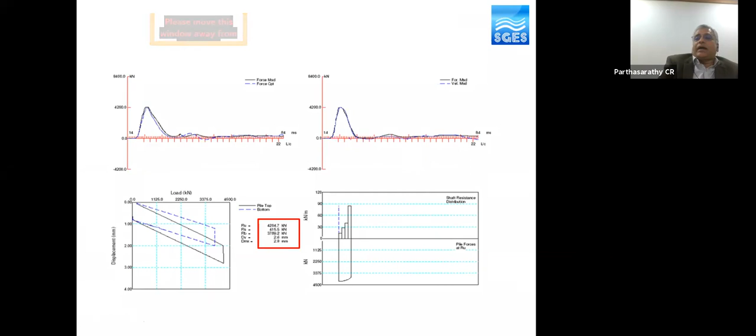So the raw data suggests there's no capacity, but the CAPWAP is analyzed and reported to have 420 metric tons of capacity. So why can this happen? It's not, may not be intentional - when the pile top is bad, you don't get data, the contractor is pushing you to give a report, so we come, I think, go out of the way to manipulate the results. But when you do a forensic study, it's all be clearly evident.

Okay, so I think this is the last one. You see the force velocity proportionality to be very good, to be unity for good data. Here it is 2.2, which indicates it's very bad data. And if you analyze this, the match quality is exceeding 5. Okay, and the pile impedance - you see the shape doesn't match actual construction.

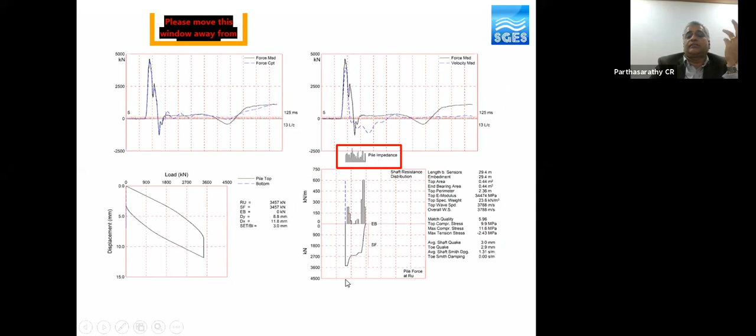The unit skin friction distribution doesn't match. So there's an automatic analysis option in the software - you click the button, it does it automatically. But whether the geotechnical evaluation makes sense is what we need to evaluate as a geotechnical engineer in this analysis. Clearly if the match quality is exceeding the prescribed value of 5, it will already give you a warning in the output. So please watch out for that.

I think I can conclude this last part. There's one case study I wanted to demonstrate. This is geotechnical data, N values with the refusal stratum, and piles are going into the refusal stratum. As you can evaluate your ultimate pile capacity—lower bound, mid bound, and upper bound—and compute your allowable capacity, this is where the designs have been made.

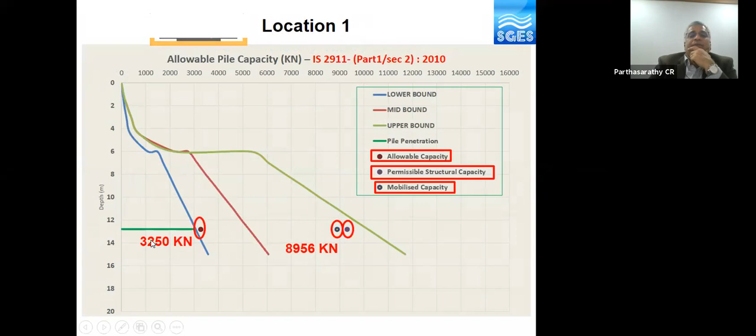When you actually test a pile, this is more than the structural capacity or the permissible structural capacity of the pile. So you see the conservatism that has been adopted, where the piles can take around 895 metric tons, but it is designed for only 300 metric tons. So it's socketed into hard bedrock.

The data is fantastic. You see the raw data here, friction, and also very high end bearing. The CAPWAP also is giving you good resistance, good match quality of 1.53, 8956 kN. So friends, the results of dynamic pile load test must be evaluated by a qualified and experienced geotechnical engineer. This is very, very important.

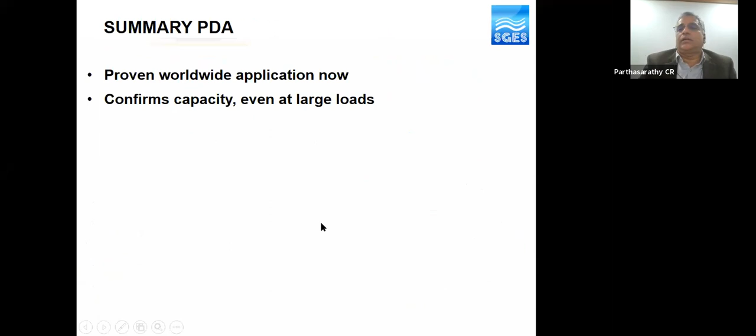In summary, this technology has proved worldwide application, confirms large capacity at large loads, reduced testing time and cost savings. PDA with CAPWAP evaluates capacity at low cost for driven piles, drill shafts, auger cast piles, concrete piles, steel piles, timber piles—doesn't matter. It gives extra valuable information on integrity, stresses, and hammer energy, potentially saves time, improves quality control, and it will be a replacement to static load test, particularly in offshore piles.